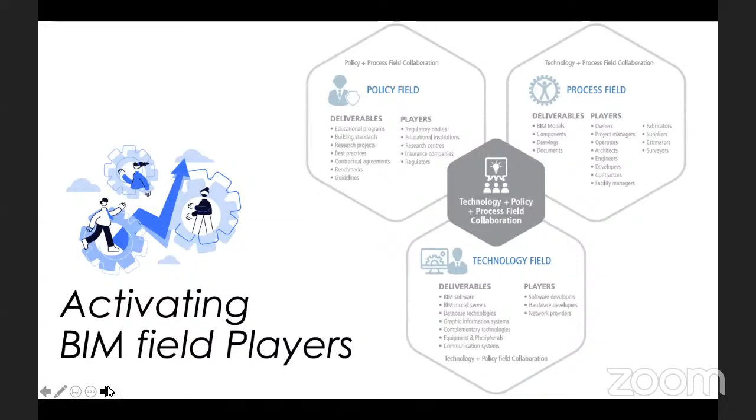What is a smart city? Coming to this, when I get into buildings - when you want to have a smart city, the most important thing is to have smart buildings, infrastructure, and smart people. So this is the major requirement.

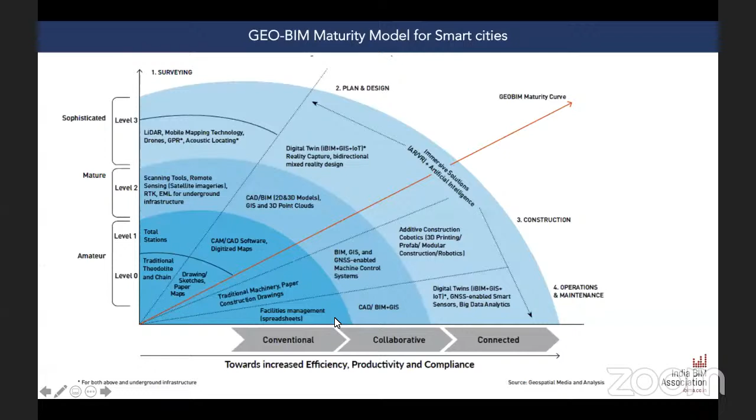So when I say BIM, you are developing a digital model of what you want to do. Before you used to do CAD, now you're developing a BIM model of architecture, structure, MEP, interiors, fire protection, electrical and other systems, and combining them, doing clash detection, then using it for different types of analysis: time, cost planning, safety, procurement, logistics, facility management, demolition, recycle. All of this you will do using the BIM model.

And crane automation, several such activities come in. Laser scanners are used many times today for historical projects and for projects which need refurbishment, to capture the real situations, and also to develop a digital twin of a real asset which is already there and use it for maintenance. Prefab has become a basic requirement today for most construction activities, whether it's building or infrastructure sector. IoT has become a day-to-day activity in smart cities and buildings, within your independent houses also.

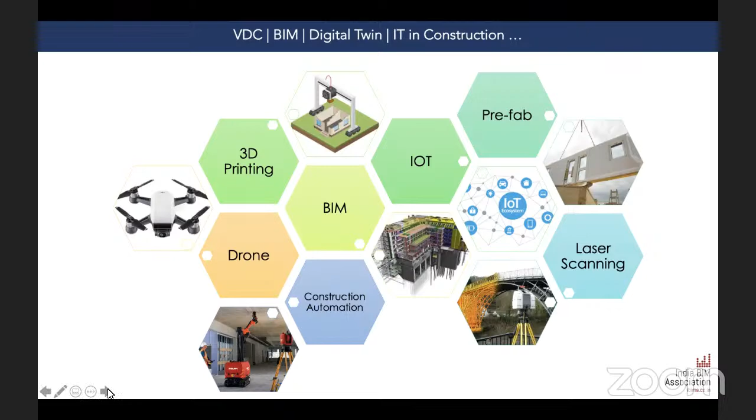Today, looking into the BIM, just one second, the slide is getting... Okay, so countries which have BIM adoption.

In India, most public clients, at least 30 to 40% of government clients, started expecting BIM in their projects, majorly from the pandemic situation, as they realized its importance.

So there's a way forward, and if you are from any of these sectors—design, contractor, consulting, subcontractors—I think you have something to learn to become part of this journey. It's not that everyone has to know how to do the model, or coordinate the model or time plan. They have different skills and software for everyone to learn, but this is misinterpreted in the market by everyone, just for their business reasons. So people are not learning the right things they need to get into digital transformation.

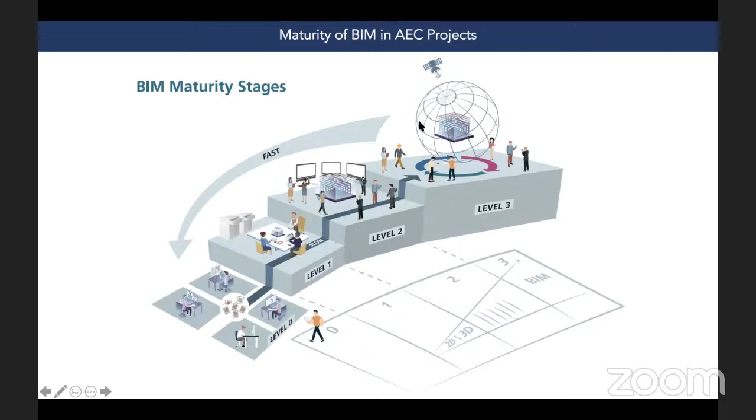Today, most of the projects are driven at level 1 alone. Level 2 is what clients are asking for in India. Level 3 is something every tech vendor, policymaker, everyone has to work on building the capabilities for.

Just to give, this is all what I wanted to discuss at a market level. All the slides you've seen are at a macro level. Now I will come to a meso level, which is at a company level. I'll just take an example of our company.

L&T, as you all know, is a big conglomerate. Within that, L&T Construction is a big company itself, within which we have several independent companies like buildings and factories, departments such as transportation infra, heavy civil, power transmissions, water treatments, metal MMH, geostructure, smart grid communications, and renewable energy. We deal with projects locally and globally, and hundreds of projects are delivered, all mega scale and mid scale projects. Today, at least 40% of our projects are driven with BIM.

Some of these are client mandates, some are internal mandates. For example, in buildings and factories, we deal with airports, data centers, commercial residential buildings, institutional buildings, and healthcare. Most of these are already driven with BIM from client requirements.

Transportation infra covers roadways, runways, railways, and metros. Heavy civil deals with metros and many other heavy projects. Power transmissions, distribution, and substations - most of these projects are from government and global clients, and they all have BIM as a prerequisite for substations and power transmissions. For water treatments, Indian clients are not asking much for BIM, but almost all projects we do in L&T with water treatments are driven with BIM.

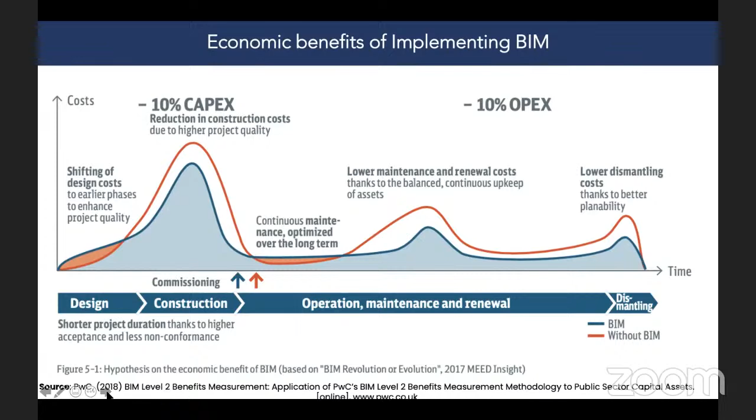What are the benefits of BIM? You can do time savings, material savings, cost savings, health and safety improvements of your workers, reduce the risk on site, improve asset utilization, quality, and the reputation of your organization.

Again, you may ask me, Amar, is this only in terms of what you're speaking? No, bring your projects to me and I will do calculations of how much saving can be done with BIM. We have formulas for calculating each of these things in different life cycle stages.

So at an organization level, what is required? Today, clients are mandating globally that BIM is required. Local clients are asking for it. So what is required at an organization?

A transformation strategy has to be put in place. What is this? A roadmap for an organization to transform. Understand the current pain points, look into the way forward journey, develop the roadmaps which align with your leadership vision and mission, set up the quarterly initiatives, choose the right set of technologies, equipment, and manpower, do the skill building, do the partnerships, and make sure you're able to be in the front line in the market for supporting your clients. This is something which has to be done in a big way.

And if you don't do this, you end up wasting your money, efforts, and time, everything.

Next one, to do implementation in any organization, what is important? You have to have the right IT infrastructure. Without having IT infrastructure—when I say IT infrastructure, it may be a space, it may be workstations, investments for drones, scanners, VR devices, any IoT equipment or construction automation equipment, all of these—it's an investment for the developments.

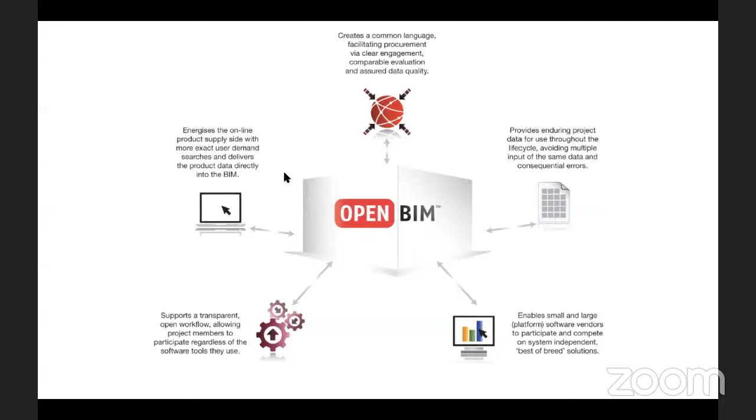Data and information - there's a lot of data that gets generated during the project life cycle, and that has to be properly sorted out during the life cycle. And BIM plays a major role in doing this.

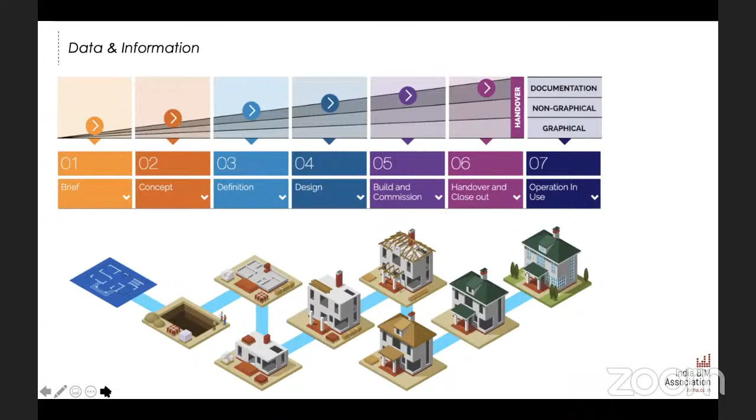People and communication - well, we have a lot of people in each of these companies. Each of them has something to do with BIM. Some people may think, okay, I speak to some HR, they say, well, BIM is nothing for me, I have what I have to learn in it. Well, if I speak to the safety team, they say, what is that BIM for me? It's a modeling team, they will do it. And some companies say, no, BIM is something we will subcontract, they will do it, we will give it to the client. This is not something like that.

It's a transformation internally to be driven in each of the companies, no matter if you are a contractor, a designer, a client, or a consultant. If a client is not mature by having his strategies in place, the client is the loser because he's not able to realize those OPEX returns. If a contractor is not able to have the right set of team internally, he's the one losing out that 10% of capex. So these are situations - it's not something that can be subcontracted. It's an internal change that has to be brought into the company.

And imagine at a contractor level, for example, in our company, we have these kinds of departments - a design team, tendering and contract, safety and quality, planning and QS, procurement and supply chain, project execution, formwork. For us, BIM is for all these departments. We're upgrading each of the departments on their respective skills.

Integrated project delivery is something which is very important. Today, what's happening in the projects is first the client comes, then the architectural consultant team comes, they coordinate, they plan out what has to be done later also without knowing what has to be done. Then comes the structure and MEP people - they think what to be done for construction without inviting contractors and subcontractors. Then contractors and subcontractors build something without knowing how the operation team can use it. This is a major problem we are facing. IPD is a procurement method which is going to answer this.

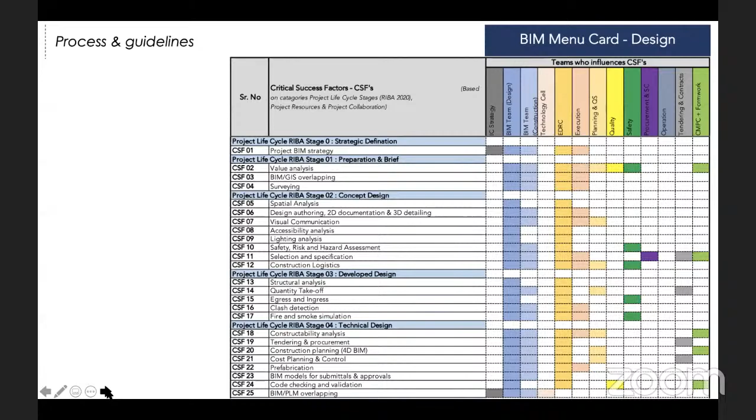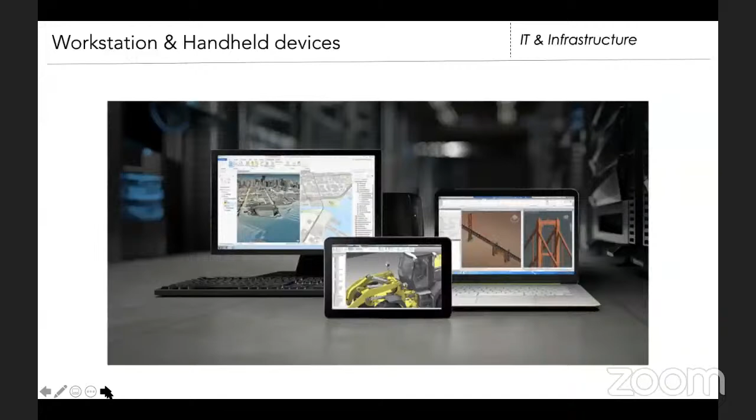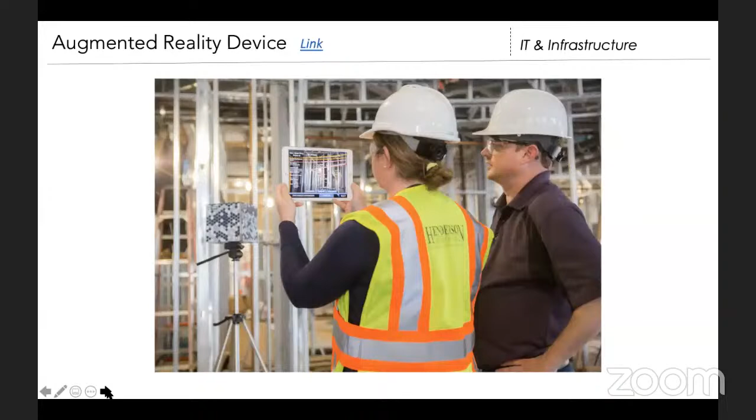So to enable all these things, a strategy in place is essential. IT infrastructure, like having the equipment, workstations, or laptops, iPads, mobile devices, using the drones, laser scanners, cyber dogs for the quality control, using the iPads for augmented reality, using this kind of BIM rooms for better experience for the clients and coordination meetings, and using this kind of indoor scanners for indoor data capture and for further measurements and revisions of interiors, and looking into smart construction devices, including the smart helmets and exoskeletons for increasing the efficiency of the manpower, using the construction automation devices like this.

And for all of these things to happen, we need a project team to be fully efficient. I'm coming more at a project level now, which is a micro level. What is this project level? Today, project is a temporary endeavor. It's not the same team always for all projects, right? So different companies and teams come together for each project, which is lasting for 6 months to 5 years to 10 years, depending on the size of the project.

So when you say at a project level, it's very much important to understand what other organizations are in the project and how the party is delivering to the next party in the supply chain. And proper collaboration, coordination, and communication among these participants are essential. And which is really missing at a project level.

Number one, people don't trust each other because they're from different organizations. Even if they're from the same organization, they don't trust and share the data. People have challenges in terms of the way the collaboration has to happen. Things are not properly defined in the contracts. People feel that's their own data. These are the challenges that need to be properly addressed to have the digitalization happen.

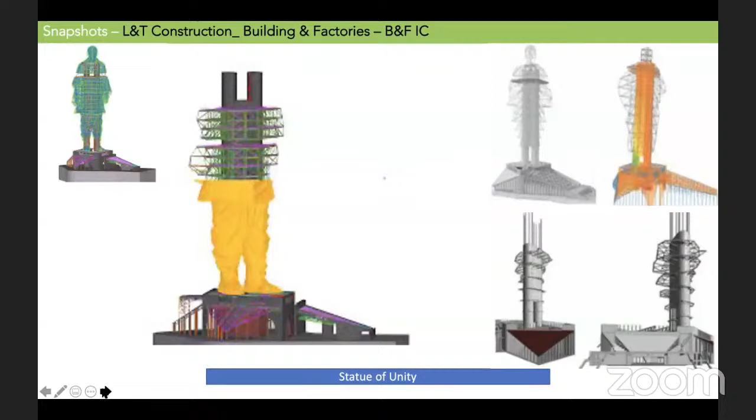I'm just showing you some example projects which our company has done. Statue of Unity was done with BIM, an iconic project. This is from buildings and factories. Most of the airports like Bangalore Airport, Delhi, Mumbai extension, Chennai Airport, and Noida, which is coming up, all of these are driven with BIM as a prerequisite from the client side.

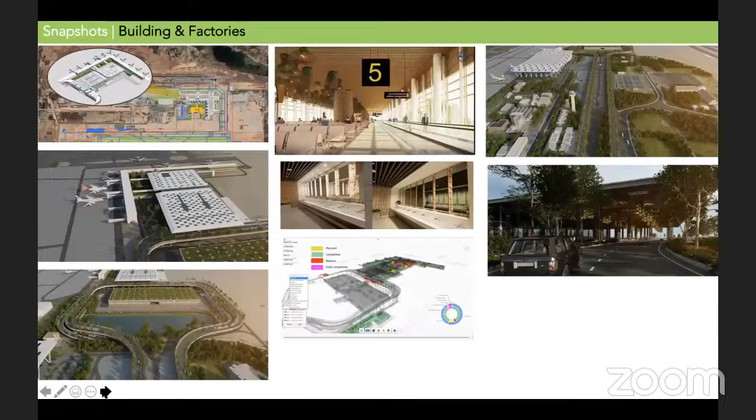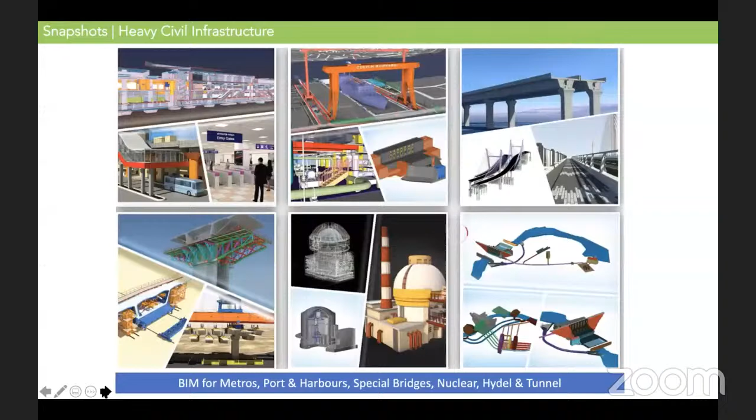There are some open BIM solutions which are very affordable. Today, if you don't want to work in a company and want to be a freelancer or consultant, there are softwares you can afford. You just need to pay 1,000 rupees per month, use it, and if you don't want it next month, you can close it. Today, a major challenge for BIM professionals is learning a software which is expensive, like 5 lakh or 10 lakh rupees. Obviously then you cannot become a consultant, you'll need to become labor for some company, and you won't make big money, you'll become just one of the employees. If you want to have a startup and give affordable solutions for clients, you have to look for affordable softwares and affordable ways of working. So for that, you have to look for open BIM solutions and these kinds of things.

I have some short videos for you.

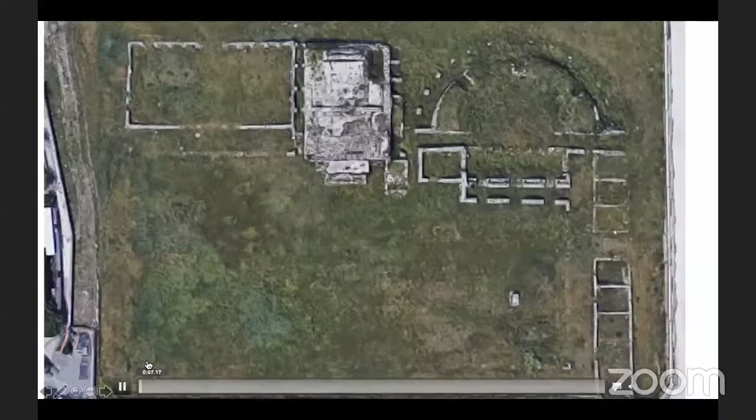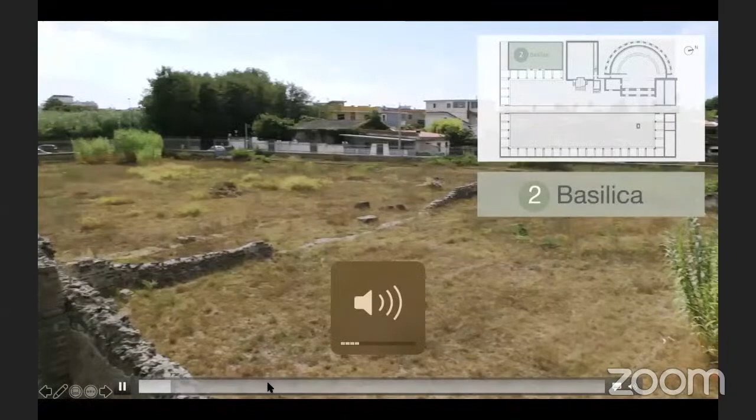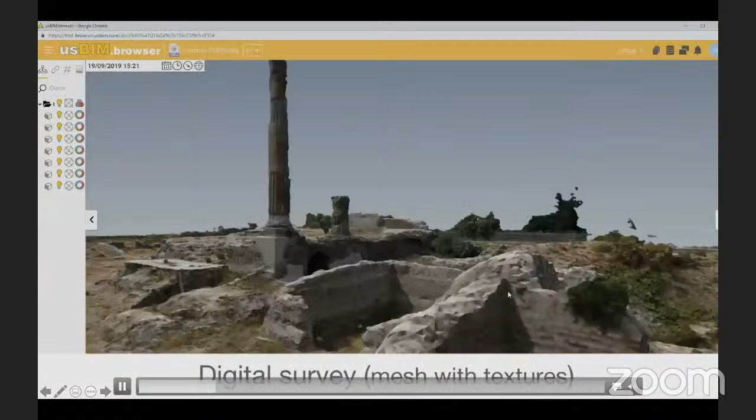This is for a historical facility from Italy, a Basilica. They have done laser scanning and developed a virtual model for it. We have very short time, so I'll just walk through these videos quickly. For example, if you want to restore a facility, you have to have this digital model with you so that you can restore the facility as it is, as per scale.

And laser scanning and BIM helps in a big way. This is for one city in Italy. They have developed a digital twin for public clients for a complete infrastructure of that client. This has a GIS model and a BIM model, both integrated, and also IoT sensors and data integrated, so the client doesn't need to go to 2D platforms for IoT data. They can directly walk through these models at the city level and click on any device to get the IoT data.

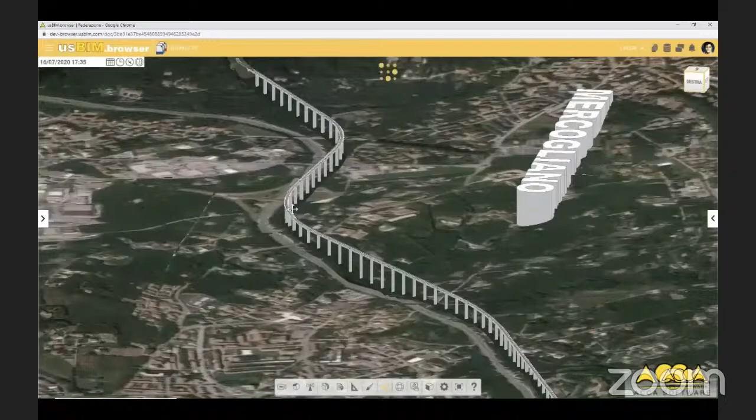You have security cameras on the national highways, for example, or any of this data. You can click on those cameras, move the positions, and see the real video. Any data in terms of how it has been planned, designed, constructed, and operated, all the data will be on the model. It's an information-rich model. This is the level of smart city planning happening in the global market today.

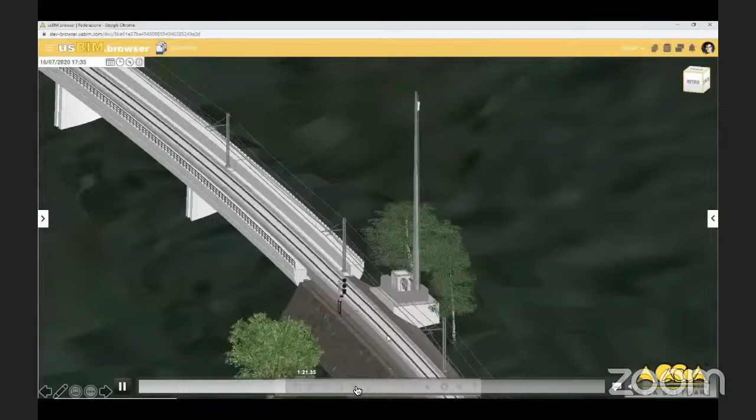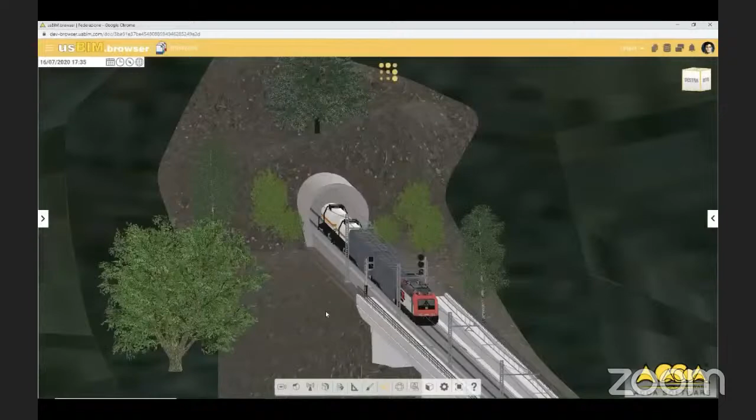There is a situation where people are doing city cloning, which is happening in some countries including China and other regions. They do a complete scan of the city and convert it to digital assets like this, and put it on the GIS map, using it as a digital asset for management.

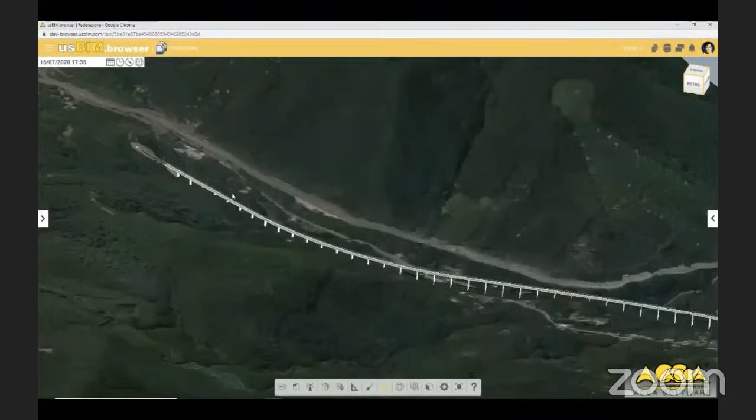This is for a railway client. They have the digital asset for them.

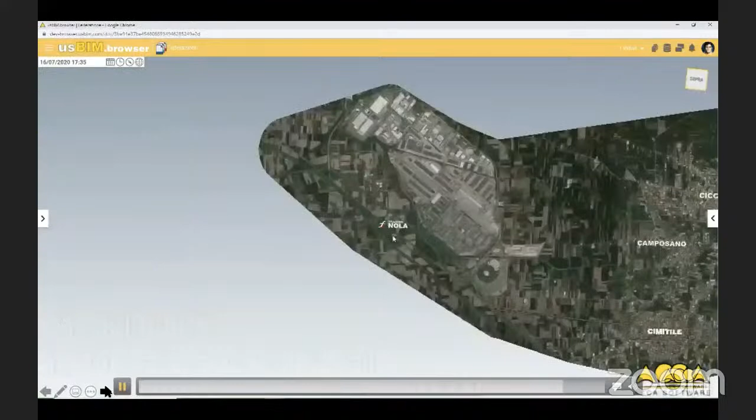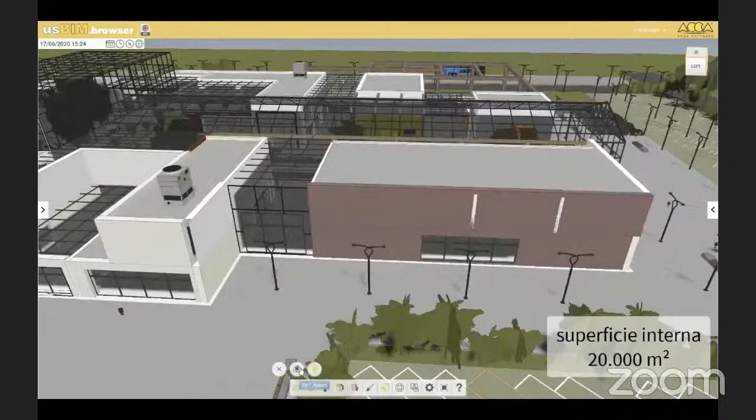This is for IoT. Today we hear Internet of Things as a big trend, but IoT data is still on a 2D platform. Now, this is the trend where BIM models are integrated with IoT devices, so you don't need to go to 2D platforms and back to the BIM model for other data. Everything is on one model of what has been built on the site. You click on each element in that model, like security webcams, or just see the dashboard on the right side.

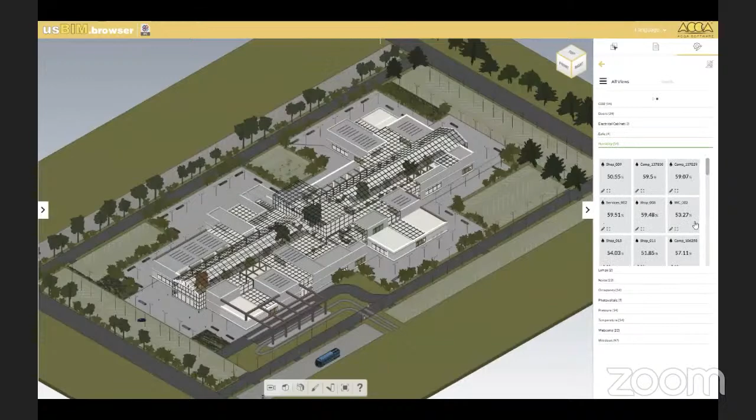You can see the carbon dioxide emission data in each of the spaces. You click on each space and get the carbon dioxide emission data, the electrical cabinet information, and the kind of energy utilization. And this is for a photovoltaic plants project, like solar plants.

So you can know from the model itself, you can click on each of the solar plants and know how much kilowatt hour energy has been generated from each of these panels. Sitting in one place, you don't need to go to that place or use 2D platforms where you cannot see which solar plant, which location.

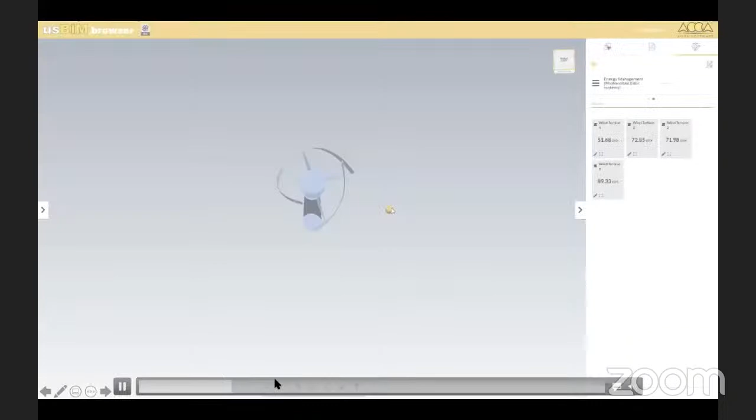And this is for wind turbines, which is again linked with an IoT device. You can see how much kilowatt hour energy has been generated. Like this again for electrical cabinets. And again, this is for security cameras.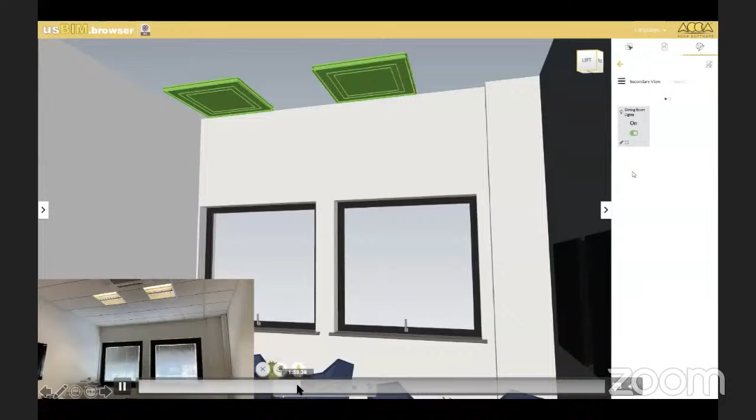If you look in this space, you can click on the security cameras and look into different spaces there. You don't need to open your mobile device to walk through the camera. You have thousands of cameras across commercial spaces, so each camera is a model and you can get the video of that region.

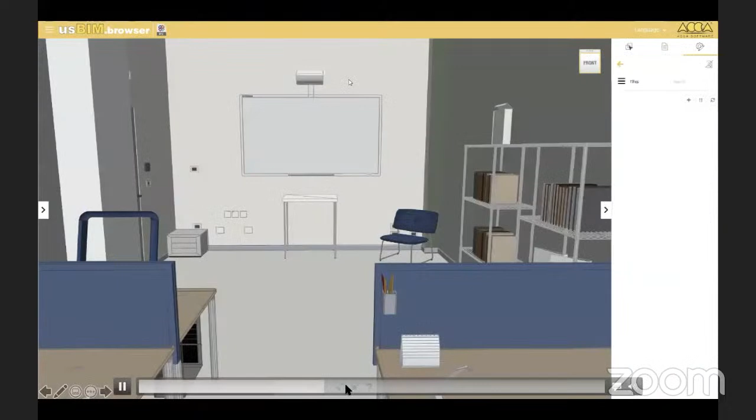And this is for windows, locking the doors - everything can be automated through the BIM. And this is for carbon dioxide emission levels. You can get to know what is the level of carbon dioxide emission in each of these regions.

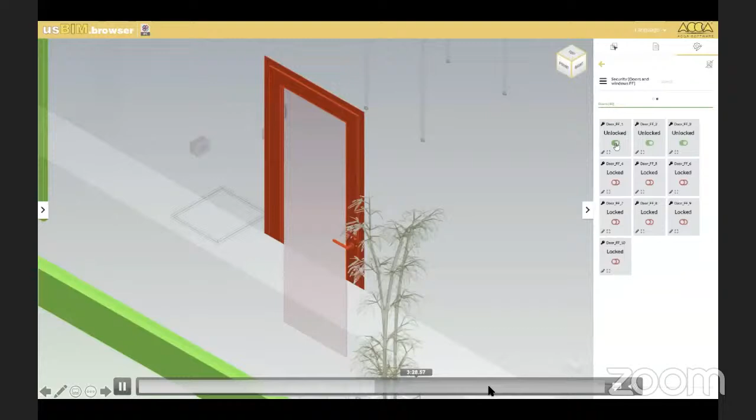Okay, you have activities that can be done with BIM. To see what this video shows.